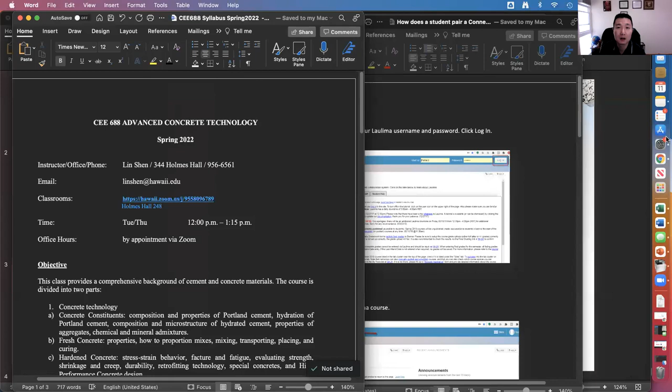So let's get started. Let's open the syllabus. Look at the syllabus. All right. So this is the syllabus. Anybody can see it? Yes, we see it. Okay, great. So there's some office information. All right, about the classrooms. So everybody knows for the first 2 weeks, we'll be doing online classes using this Zoom ID, 9558096789. There's no password.

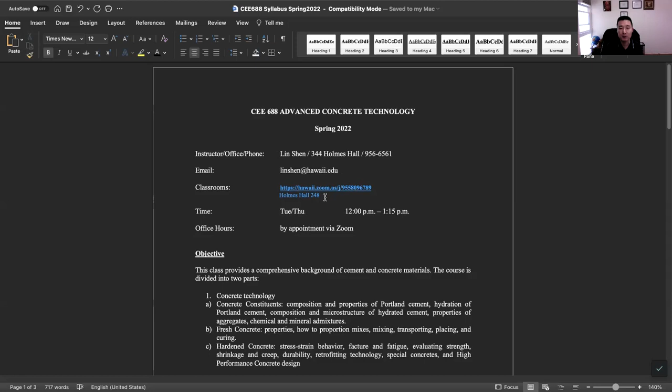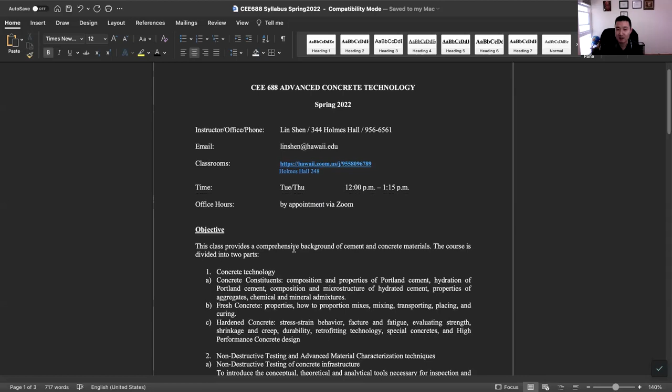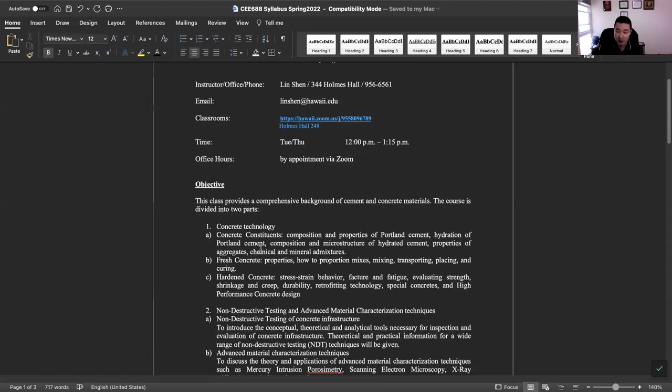We talk about concrete constituents, composition, properties of Portland cement, the cement chemistry, the hydration of Portland cement, microstructure of cement, properties of sand and coarse aggregate, and also admixtures, including chemical and mineral admixtures.

Okay. For fresh concrete, we talk about how we can measure the slump flow, air content, and other properties, and how to design a concrete mix, and how to prepare the concrete mix, transportation, placing, and curing the concrete.

For hardened concrete, we'll study the stress and strain behavior, fracture mechanics, fatigue, how to evaluate strengths and other mechanical properties, shrinkage and creep, long-term durability issues such as freeze-thaw, ASR, sulfate attack, corrosion, and so on.

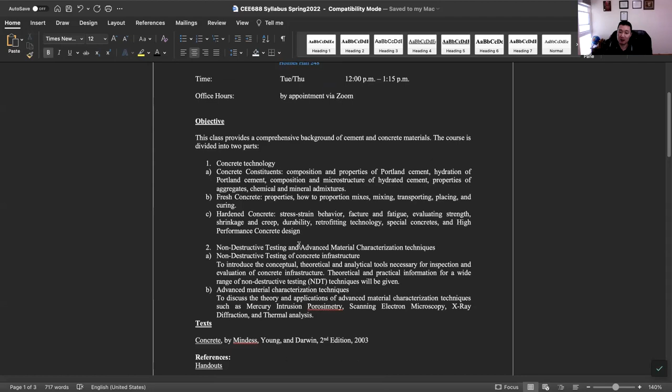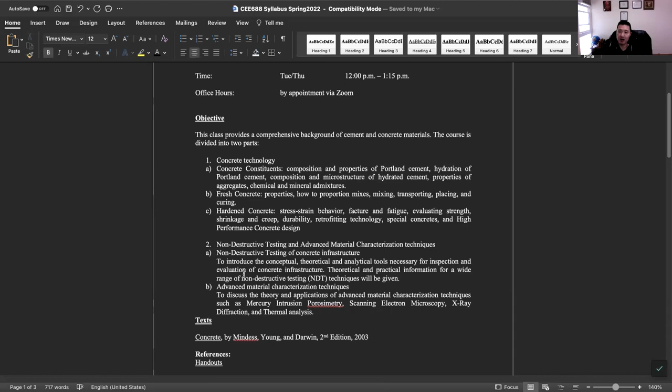Okay. And the second part of this class is called non-destructive testing and advanced material characterization techniques. So we'll talk about NDT methods, including ultrasound, ground penetrating radar, and how to choose different types of method depending on the applications.

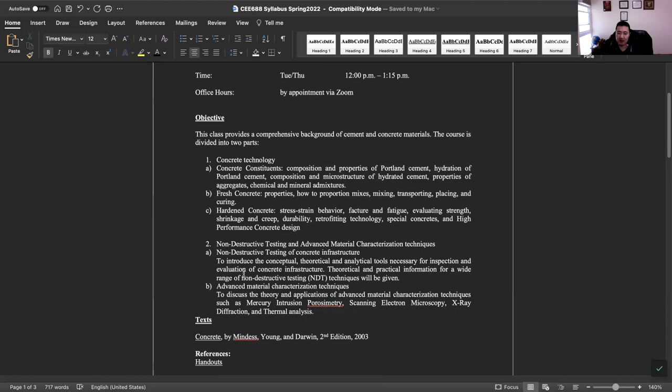We also study microstructure analysis techniques such as mercury intrusion porosimetry, scanning electron microscope, X-ray diffraction, and thermal analysis. So these are methods that are being used to study the microstructure and also chemistry inside the materials, not only limited to cement and concrete, but can also be used for other types of materials.

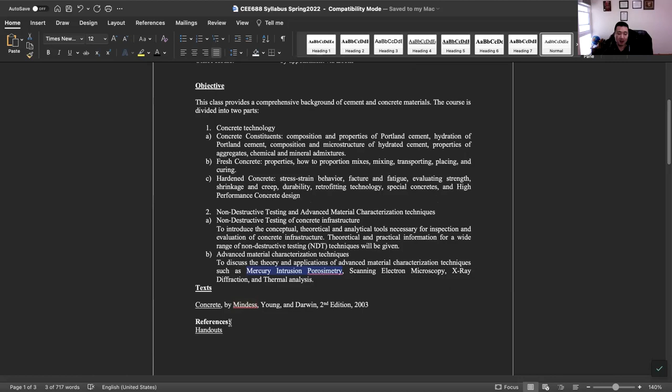The textbook, the title is called Concrete. The authors are Sidney Mindess, Young, and Darwin. This is the second edition. I'm not sure if you can find it from the bookstore. If not, you can try to buy a second-hand book from Amazon, for example.

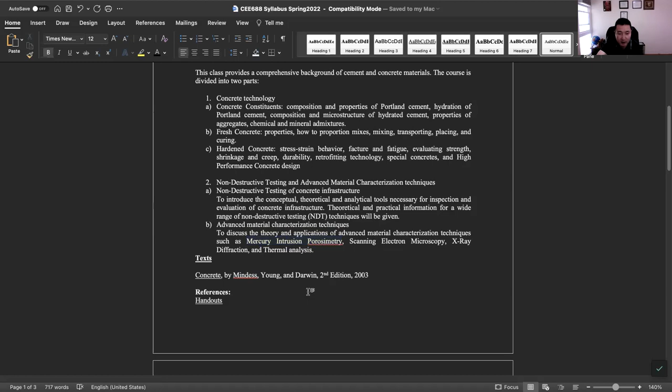I think for this textbook, you don't have to buy it for yourself. Maybe 2 or 3 of you can buy one book together. That should be enough. I also have one copy in my hand, so if you want to have a look, you can borrow from me. The majority of the information will come from handouts. So before the start of each lecture, I will upload the PowerPoint presentation so you can download it.

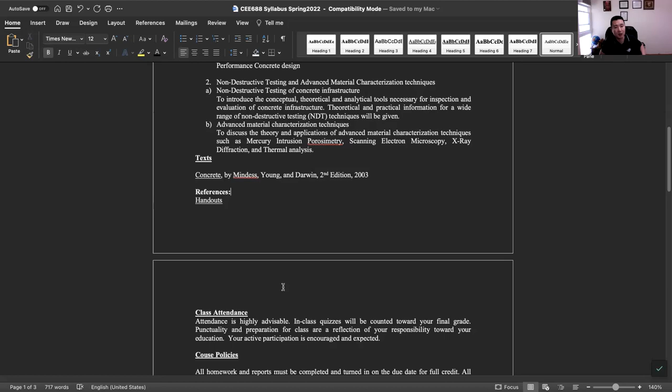All right. So what else? So about assignments, we have several homeworks, not too many, and also maybe 1 or 2 quizzes. We have 2 midterms and 1 final exam. The midterm is 15% each, and the final exam is 30%.

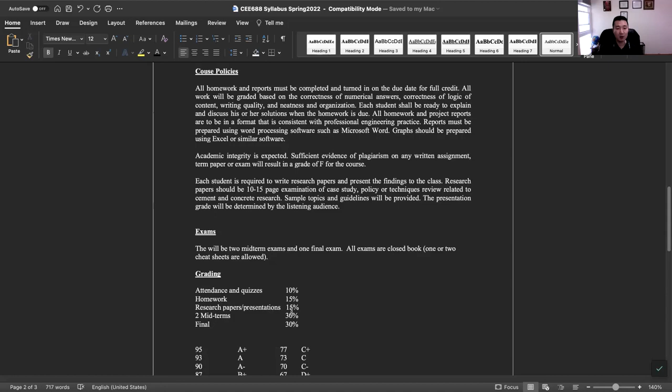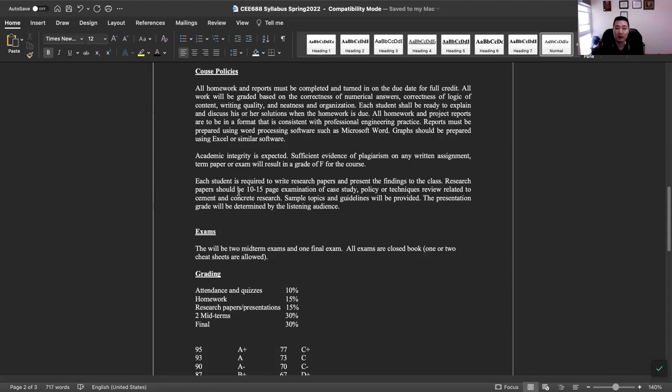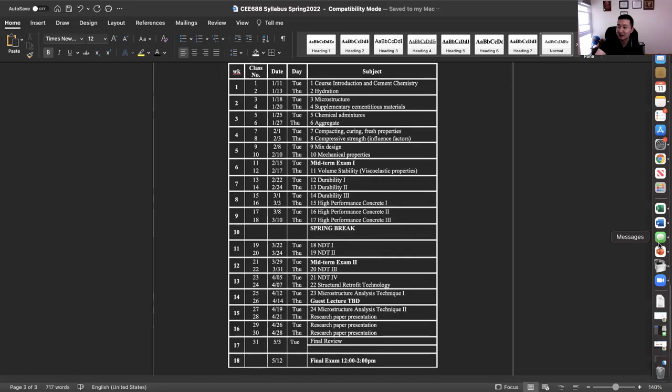All right, this is the tentative schedule for the class. Okay. So any questions before we start the formal lecture? Questions? Okay. Okay, so you downloaded a free copy of the textbook. Okay, that's wonderful.

So why should we study concrete? Concrete is by far the most widely used construction material. Actually, concrete is the most used man-made material. Concrete is the backbone of infrastructure. Almost any type of infrastructure can be made using concrete. Buildings, bridges, pavement, roads, you name it. So all kinds of infrastructure can be made from concrete.

In the US, every year, we use about 2 tons of concrete for each person. Concrete has a long service life. Well-designed concrete can last for hundreds or even thousands of years. Concrete is also resistant to fire and resistant to impact. The value of concrete is very high. The cost of concrete is much lower compared to steel and aluminum, and the cost of repairing concrete structures is relatively low compared to other types of structures.

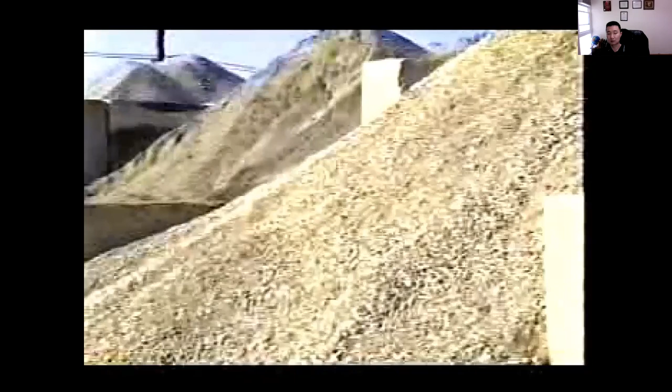Concrete is a mixture of Portland cement, water, and aggregates such as rock and sand. The aggregates serve as the filler material in concrete, while the Portland cement and water form a paste, which serves as the glue that holds the aggregates together. Through the chemical reaction called hydration, this paste hardens and binds the aggregates into a strong, durable mass we call concrete.

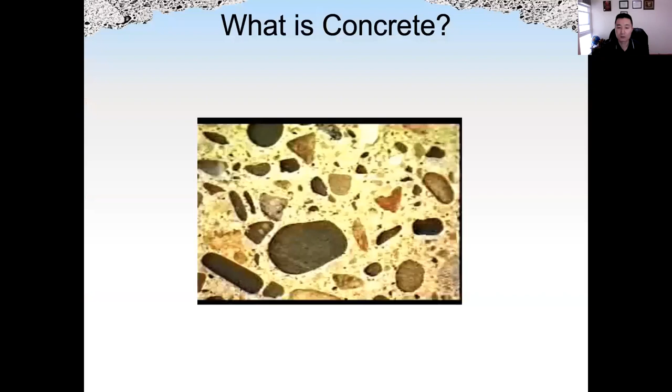So the word concrete is coming from the Latin word concretus, which means hold together, or formable rock. In concrete, the most important material is Portland cement. So why is it called Portland cement? We'll discuss that in a moment. This is the glue, the fine powder. Together with water, Portland cement will form cement paste. So that's the glue which holds other materials together.

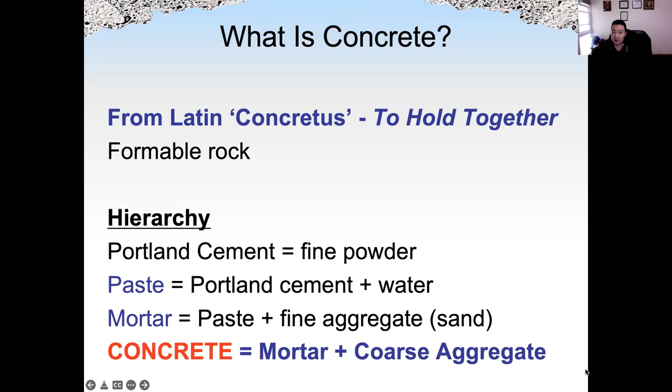Mix cement paste with fine aggregate, which is another word for sand, and we have mortar. If we add larger stone, which we call coarse aggregate, into mortar and mix it, we have concrete. So in concrete we have cement, water, sand, coarse aggregate, and any type of admixtures. It is not necessary, but it is very commonly used. We'll talk about admixtures in future lectures.

So depending on the requirement for the concrete, such as the strength, different concrete has different proportions of its materials, as we can see from here. Also, we have a small amount of air, typically around 1 to 3% by volume in the concrete. The air is put in concrete either on purpose or not on purpose. For example, if we want to increase the concrete's resistance to freezing and thawing, we use an air entraining agent to introduce small air bubbles in concrete, so concrete will be more durable in winter time.

The reason we put sand and coarse aggregate, small and larger stone, in concrete is, one, to reduce the cost. The cost of aggregate is about 10% or less compared with cement. Portland cement is the most expensive material in concrete, besides admixture. Aggregate can also reduce shrinkage and creep of concrete. If concrete shrinks too much, it may crack and reduce the strength and durability. So aggregate can also help to reduce the shrinkage cracking of concrete. And it will make concrete less brittle, increasing the toughness of concrete.

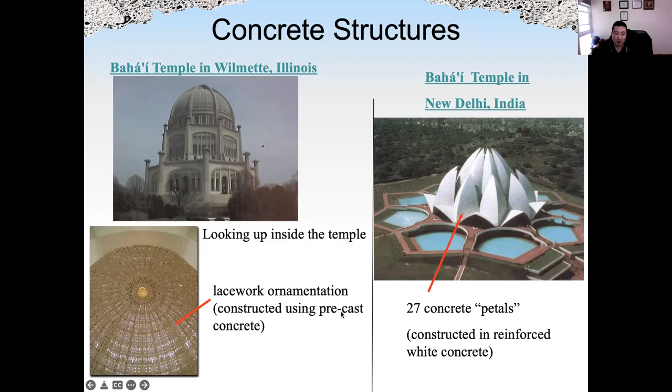So here are some of the famous concrete structures. The Baha'i temple in Illinois; the picture was taken near Northwestern University. The picture on the right is also called Baha'i temple. This is in India. The color of the concrete, as you can see, is white. It's made by white cement. Inside that cement, it doesn't have any iron, which makes the color white. Other than that, a typical concrete will have a grayish color. And concrete is called formable rock. It can be made into very complicated and delicate shapes, as we can see from the picture on the lower left. So this is one type of precast concrete.

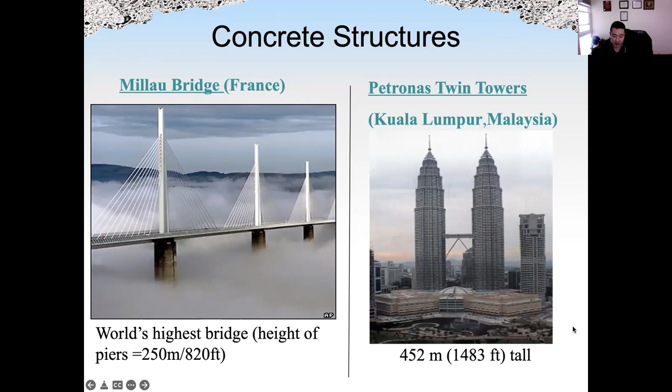So some of the biggest concrete structures: this is one of the biggest bridges, the Millau Bridge in France. The pier of this bridge is 250 meters, or more than 800 feet high. This is one of the tallest buildings, in Malaysia, the Petronas Twin Towers, 1,483 feet tall. The tallest building currently is in Dubai, the Khalifa Tower. The height is 2,700 feet. The total cost for this building is 1.5 billion US dollars, and it has 165 floors.

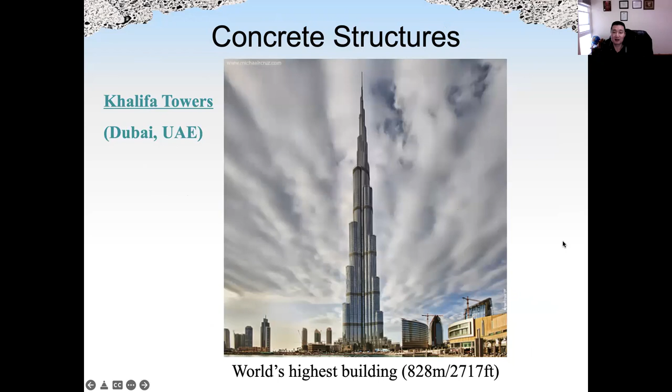So as we mentioned before, concrete can be used in roads, concrete pavement, reinforced concrete bridges, reinforced concrete buildings, waste treatment facilities, dams, nuclear reactors, subways, and so on. This table compares the important properties of concrete with other building materials. Concrete is in the last row, compared with steel and aluminum. Concrete is lighter, 2,300 kilograms per cubic meter. Steel is about 3 times of it.

The strength of concrete is much lower compared with steel, especially tensile strength. Compressive strength is in parentheses here. A normal concrete has a compressive strength around 30 to 40 megapascal. 7 megapascal is equal to 1 ksi. Tensile strength is much lower, about 10% of its compressive strength, so a typical concrete has a tensile strength of around 3 megapascal. The elastic modulus of concrete is around 25 to 30, which is also much lower compared with steel.

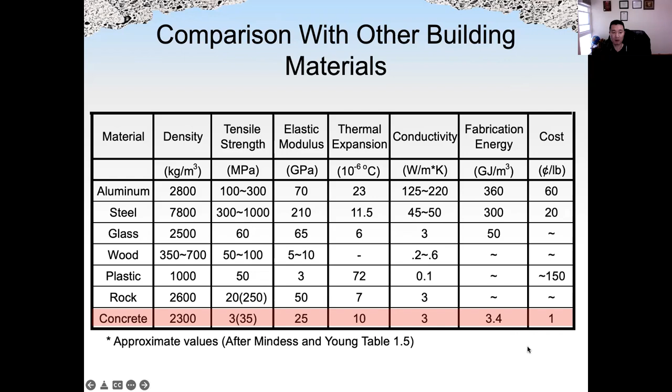This table is coming from our textbook, table 1.5. All right, pros and cons of concrete. Advantages: concrete can be made very durable, but if it's not designed very well, it can only last a few years. A well-designed concrete can last easily 100 years or even several hundred years.

It is cheaper, economical. Concrete can be formed on site to any type of shape very easily. Probably everybody has seen concrete cast in the formwork and formed on site. Concrete is also energy efficient. It is a very good thermal insulator and costs less energy to make compared with steel and aluminum.

Concrete is highly resistant to fire and has thermal resistance. Concrete can also be made resistant to water, so we can protect the rebar using the concrete around it. But concrete is very brittle, especially under tension. That's the major disadvantage for concrete, and that's why we use steel rebar in reinforced concrete structures.

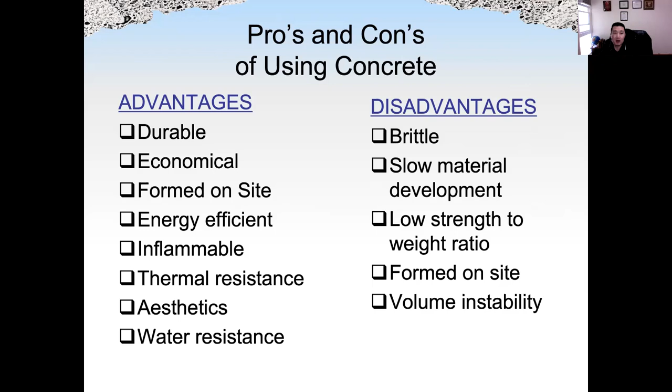So concrete has been with us for thousands of years, more than 5,000 years from ancient Egyptians. But ancient concrete is different from modern concrete. Around 3000 BC, ancient Egyptian engineers used gypsum mortar or lime with straw as reinforcement to make the famous pyramids. We'll talk about the chemistry of this ancient concrete in a moment. About 2,000 years ago, the ancient Romans built the famous Colosseum and Pantheon using their concrete. Again, their concrete is different from modern concrete.

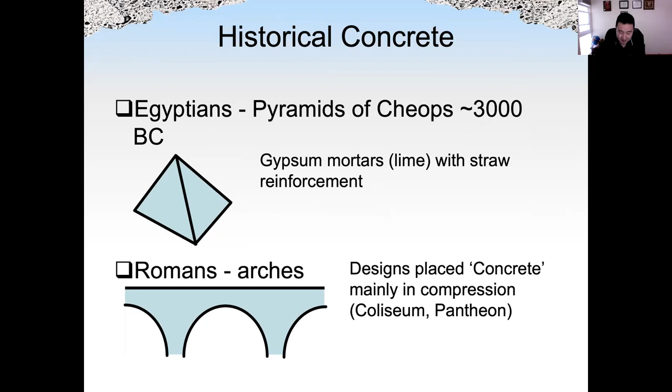All right, so everybody knows reinforced concrete, and why we put the rebar in concrete; we'll just quickly go over this. For a plain concrete beam without rebar, because concrete is very weak under tension, under this load the bottom part of the plain beam will crack very easily. So the moment resistance of the concrete beam without rebar will be very, very low. By putting the reinforcement in the tension area, we increase the moment resistance of the beam much more.

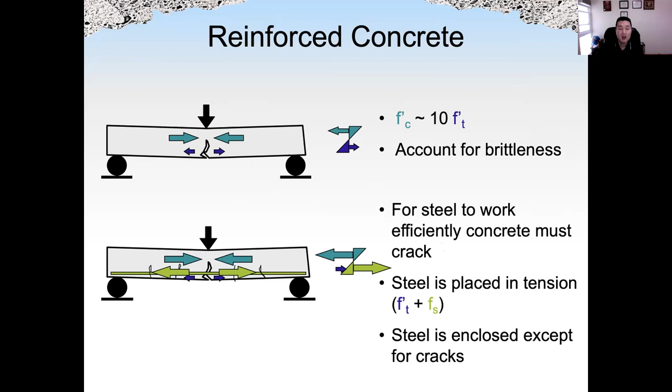So steel is placed in the tension area, but steel is easily corroded by water and oxygen, so it needs to be protected by concrete. Steel is enclosed except for cracks. For steel to work efficiently, concrete must crack first, but that crack is very minor. Without any cracking, the rebar and the concrete cannot work together. So any reinforced concrete member, no matter how well it's designed, must have some minor cracks for the rebar and the concrete to work together.

So here are some innovations in concrete fabrication. We can use precast concrete. We can make the concrete very flowable so we can even pump it. Shotcrete is also a type of very flowable concrete. We also discuss extrusion, a fabrication method that can make concrete into any shape. Self-consolidating concrete is concrete that needs no consolidation, which accelerates the production process. Concrete needs curing to develop its strength. We can use typical curing, high temperature steam curing, or even microwave.

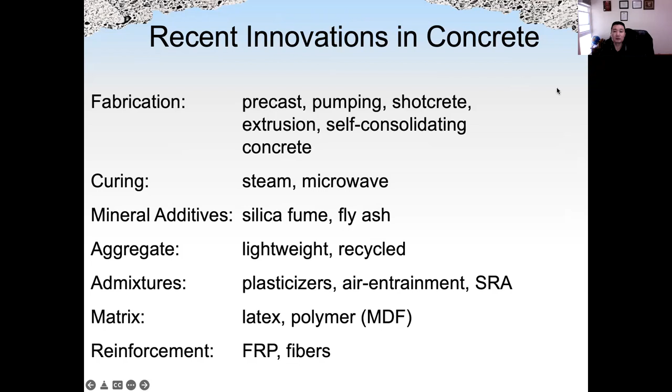So, question of scale. If we look at the concrete in macro scale, we see concrete as a homogeneous material. But in fact, we know already concrete has sand, has coarse aggregate, and also has cement paste. So if we look at the concrete in centimeter scale or meso level, concrete is not homogeneous. So we call that heterogeneous structures, because we can see aggregate and cement.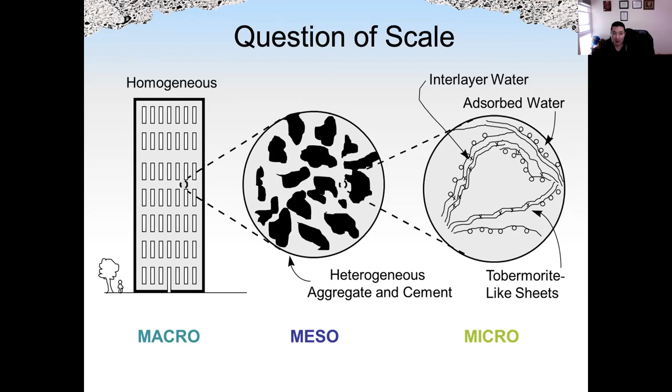So in order to better design concrete in the macro level, we need to study and understand the concrete in the micro scale and the meso scale. Okay, so that's the main purpose for this class. All right, so that's the short introduction of concrete. What is concrete? What are the major materials in concrete?

The second part of this lecture will discuss cement chemistry, so the major chemicals inside the concrete. So before we do that, we'll discuss what is hydraulic cement, what is so-called non-hydraulic cement, how to manufacture cement, the major cement composition, the chemicals inside cement, different types of cement, blended cement and special cement.

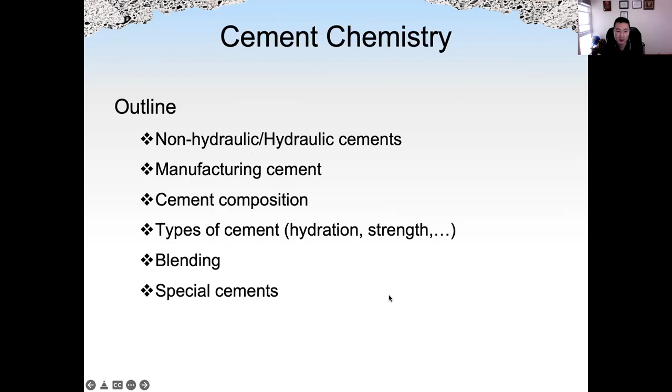Right. So this is ancient cement chemistry that the ancient Egyptians and ancient Romans used. So 5,000 years ago, the ancient Egyptians used this to build the pyramids. They used calcinated impure gypsum. Gypsum is calcium sulfate with 2 parts of water. So we heat gypsum to 130 degrees Celsius, and the gypsum will decompose into calcium sulfate with half water. We call that calcium sulfate hemihydrate, and it will release water.

So this calcium sulfate hemihydrate will be ground into powder. That's the second reaction. This powder form calcium sulfate hemihydrate will mix with water again, and then, as we can see, it will form gypsum. Gypsum has some strength, not as strong as modern concrete, but strong enough to hold the rocks inside the pyramid. So this is the ancient cement the Egyptians used.

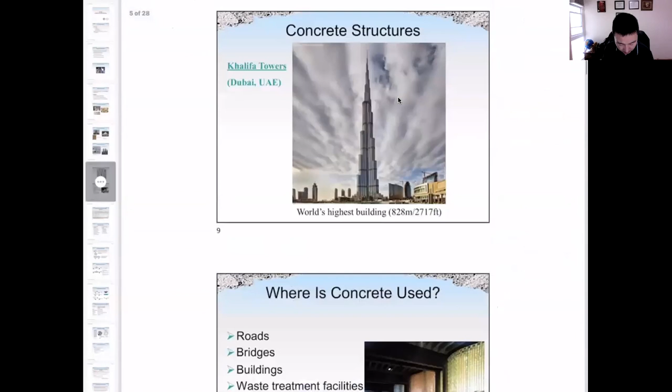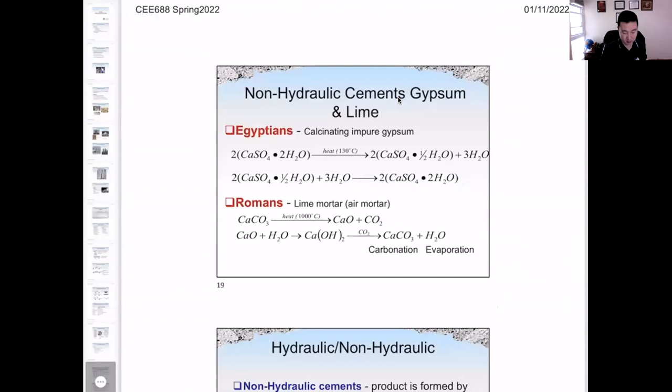Let me show you the chemical reactions of this. Let me show you how limestone will react with water. So CaCO3, limestone, is not easily dissolved in water, but over time, limestone CaCO3 will react with water plus CO2 coming from the air. It will generate so-called calcium bicarbonate, so this is not water resistant. So slowly over time, limestone may be dissolved in water.

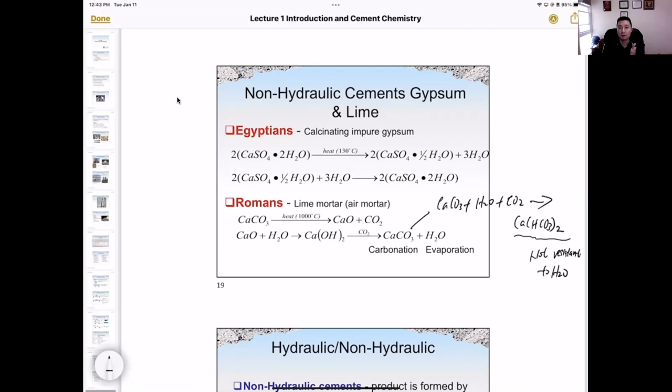All right, so then come back to non-hydraulic cement and hydraulic cement. So the so-called non-hydraulic cement, the product is formed by carbonation, such as the concrete used by ancient Romans and ancient Egyptians. But it is not resistant to water, as I just showed you. But it may be made water resistant by adding pozzolanic materials. We'll discuss this in future lectures, so don't worry about that.

Hydraulic cement is defined as hardened by reacting with water, and the hydration product is water resistant. For example, the modern Portland cement, the cement we use today. So Portland cement is a type of hydraulic cement made by pulverizing the clinker, consisting of hydraulic calcium silicate. We'll discuss how we can make Portland cement in a moment.

All right, so here shows a little history about hydraulic cement. The first natural hydraulic cement was invented in England in 1796. It's made by calcinating nodules of impure limestone and clay. So limestone, the major chemical in limestone is calcium carbonate. In clay, it has silica oxide, maybe some aluminum oxide, maybe some calcium oxide.

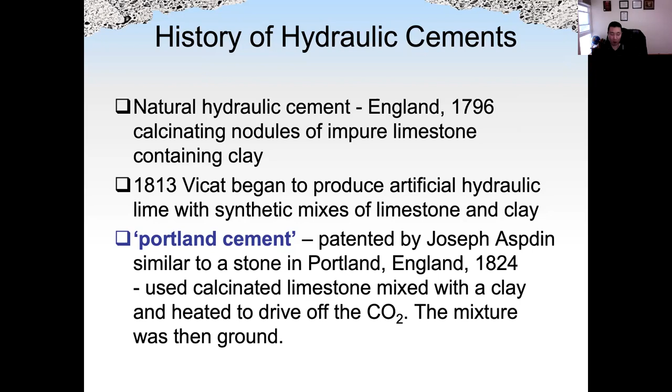All right, so here shows the picture of a stone coming from the small island of Portland in England. So this is a stone from Portland in England, and this is a cylinder of modern concrete. Again, the reason we call them Portland cement is because the color of these two is very similar. Nothing more.

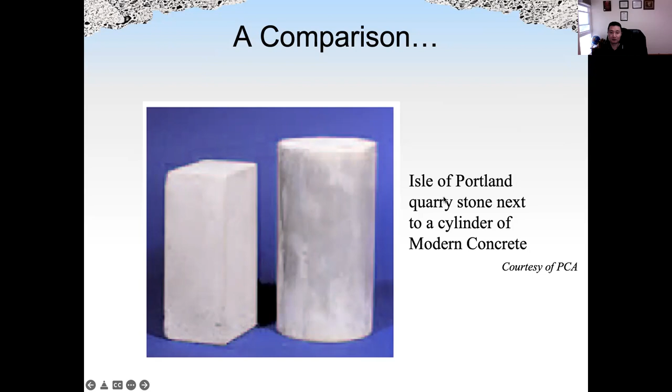How can we make Portland cement? So the major steps to produce cement. First, we need to obtain the raw materials from limestone, from clay. We need 4 major raw materials: lime, iron, silica, and aluminum. If you take the first letter from each of the words, you get LISA, or Lisa. We need lime, which is calcium oxide, iron, which is ferric oxide, silica oxide, and also aluminum oxide.

We prepare them, mostly grind them into smaller size, and then we burn these materials in a large oven. We call that clinker, the clinkering process or burning process. So finally, we grind this clinker into fine powder.

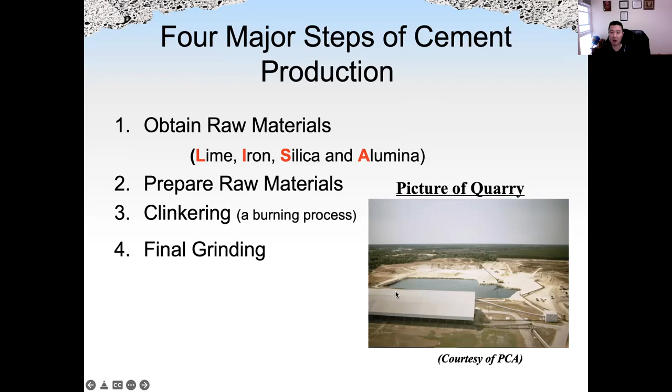So here is a picture of a quarry where we get our raw materials. The source of raw materials, remember, we need 4: calcium, iron, silica, and aluminum. You can see we also have the 5th raw material, sulfate. So why do we need sulfate beside the top 4? We'll discuss that in a moment. So let's look at the source of these raw materials.

So for calcium, we can use limestone, which is the natural source, or we can use some byproduct, such as cement kiln dust or slag. Slag is an industry byproduct of the steel producing process. For iron, it can come from clay or iron ore or other minerals such as shale. Silica can also come from clay, which is the natural source.

Fly ash is a major industry byproduct of the coal burning process, also called coal ash. We can also use slag to produce the silica needed for cement production. For aluminum, we can also use clay, fly ash, slag, shale, or other natural and man-made materials. Sulfate is mainly coming from gypsum.

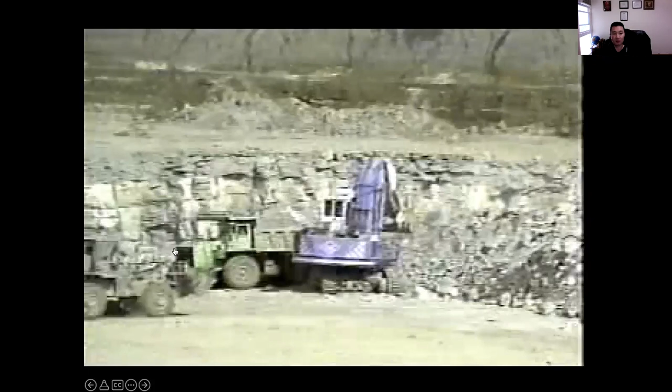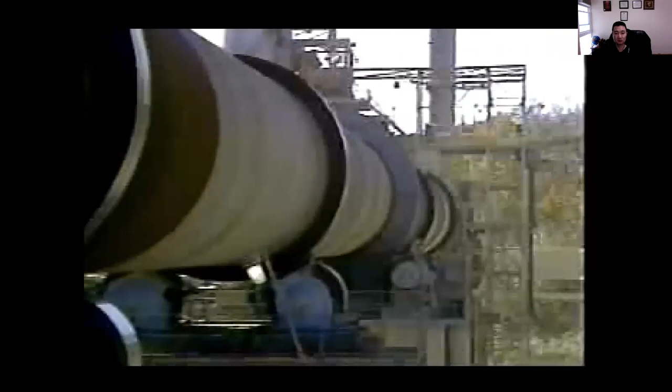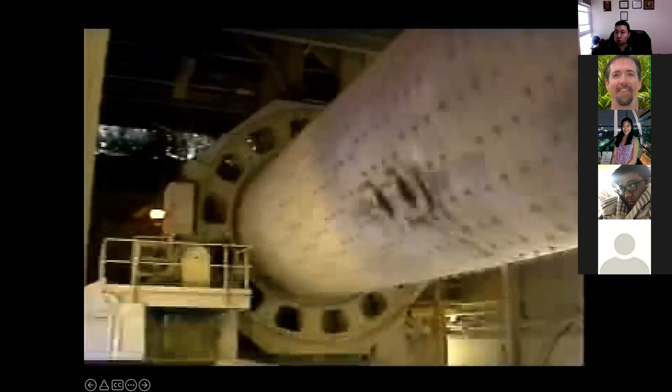Portland cements are manufactured by a process that begins by combining a source of lime, such as limestone, with silica and alumina, usually from clay, and a source of iron oxide, such as iron ore. The selected raw materials are then crushed, blended, and burned in a kiln to produce clinker. Once cooled, the clinker, with a small amount of gypsum added to regulate the setting time of the cement, is ground in a mill to produce the extremely fine gray powder called Portland cement.

Okay, so the first step is we need to get the raw materials from a quarry. Limestone, shale, clay. The stone is reduced to a smaller size, from 5 inch to less than 1 inch, and stored.

So the second step is the raw materials need to be ground into powder and blended accordingly. Limestone, clay, sand, iron ore are proportioned and ground into smaller size. In the second step, we have 2 types of processes: the dry process and the wet process.

So the difference between these 2 processes is for the dry process, no water is added. For the wet process, water is added to facilitate the grinding process. For modern Portland cement production plants, mostly the dry process will be used. So this is the newer method, the dry process.

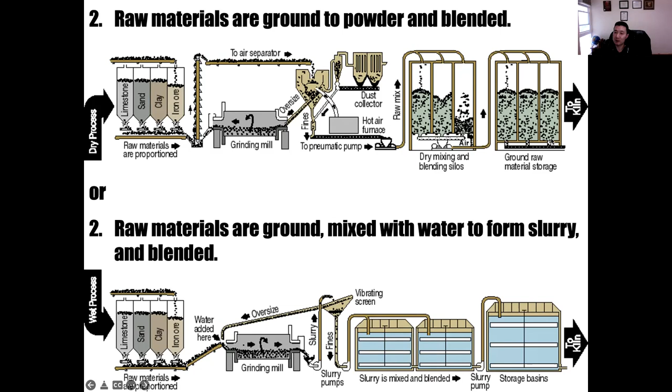So after the raw materials are mixed, they will blend it into silos and ground raw materials into storage before they go into the next step, which is the burning process inside the kiln.

Okay, so this is the kiln, which is a huge oven with very high temperature inside it. The kiln is slowly rotated, so the speed of the rotation is very slow. The diameter of the kiln is around 20 feet or more, and the length of the kiln is around 500 to 600 feet.

So very big, and you can see there's a slope inside the kiln. So the raw material is coming from the higher end and slowly going to the lower end, and inside the kiln, the clinker will be generated. We will look at the details in the next slides.

So materials coming from the kiln is called clinker. The clinker will mix with the gypsum and be further ground in the next step, which is step 4. So the clinker with gypsum is ground into fine powder, and we call that Portland cement.

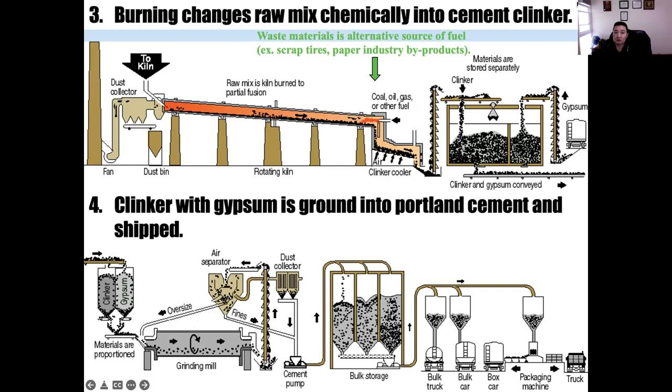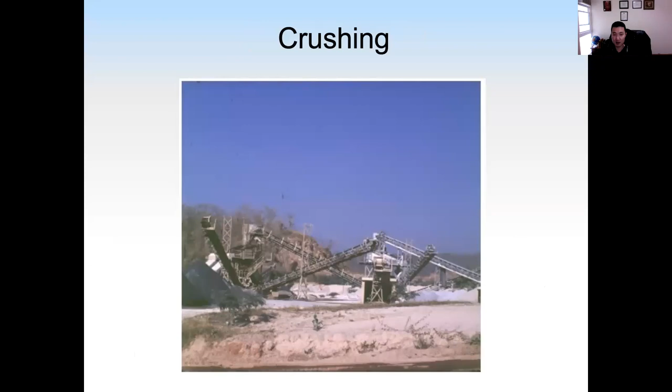So here shows the picture of a quarry. The larger stones will be crushed into smaller size. So this shows the crushing process. And then different raw materials will be blended before going to the kiln.

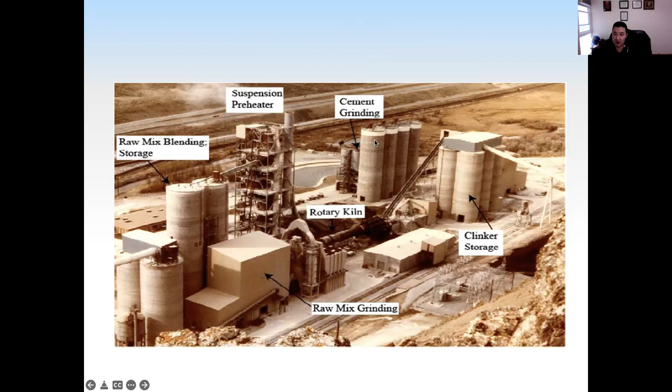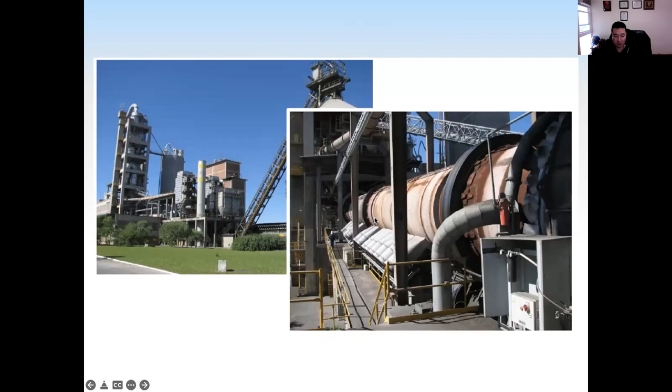So the larger picture of the kiln, as you can see, it's very, very big. Another picture of the kiln. So the rotational speed of the kiln is very slow. Every hour, it will only rotate like 60 revolutions. So 1 revolution per minute. So slowly rotated.

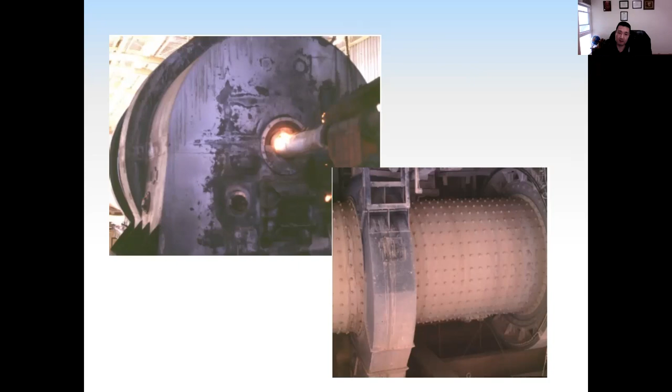All right. So the burning process in the kiln will generate a lot of pollution, and also use a huge amount of energy because the temperature inside the kiln is very high. In fact, to produce 1 ton of cement, 1 ton of CO2 will be generated. About 7 to 10% of the total man-made greenhouse gases come from production of cement. So a lot of air pollution, a lot of energy.

So schematic of cement production. Again, we have raw materials such as limestone, clay, and shale. They provide different raw materials: calcium oxide, silica, alumina, and ferric oxide. They ground it and store together. They go into the preheaters before going to the burning kiln.

Inside the kiln, cement compounds such as C3S, C2S will be generated. And then gypsum will be added into the clinker for final grinding.

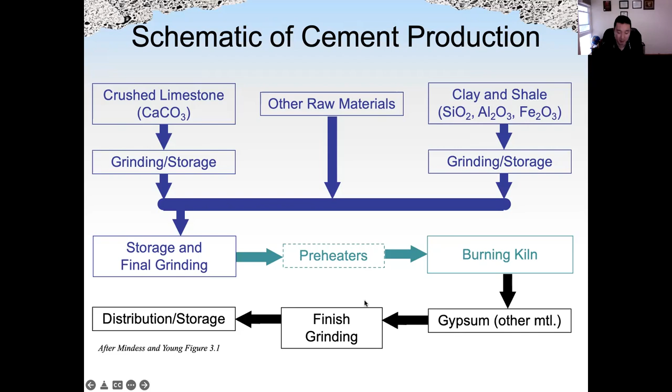All right, here shows what happened inside the kiln. So the raw materials are fed on the higher end, depending on the temperature. We can see the gas temperature or the feed or raw material temperature. So the temperature increases from 450 to more than 1500 degrees Celsius.

So the first zone is called the dehydration zone. The water is evaporated, CO2 is generated because the clay will decompose and release this CO2. And then the calcination zone, where limestone will decompose and release CO2. At the lower end of the calcination zone, we'll have initial formation of C2S. We'll talk about this in a moment. So C2S is one of the major compounds of cement.

And then we have the clinkering zone, which is between 1350 to 1550 degrees Celsius, where the formation of melt occurs. The melt is a combination of C3A and C4AF, other compounds to be discussed in a moment, and also formation of C3S. All right, clinker is out of the lower end of the kiln. So look at the clinker picture on the left.

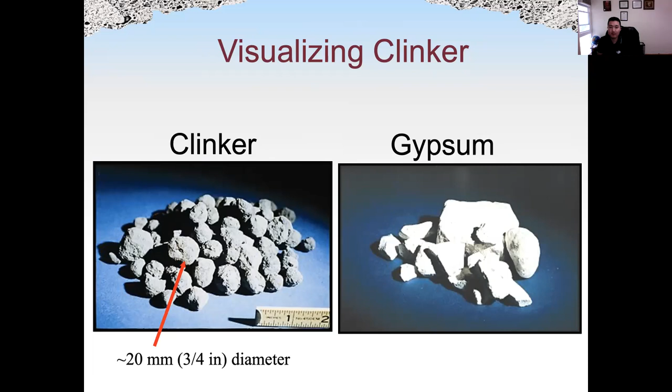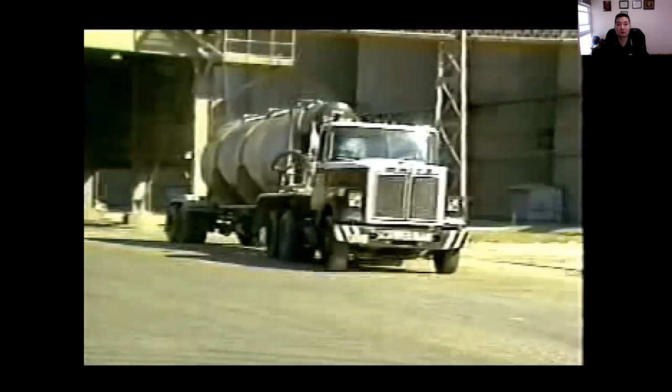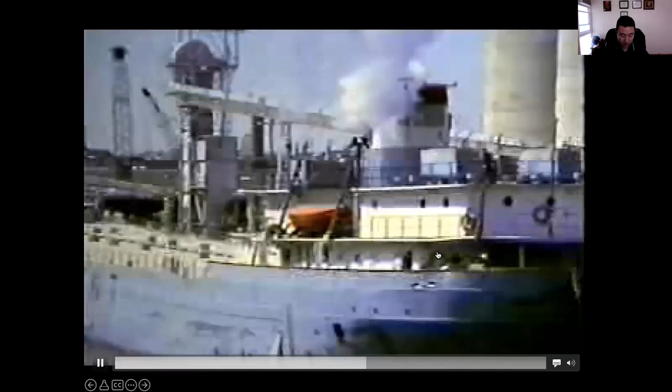All right, so how can we deliver cement? Portland cement is available as a bulk powder or in waterproof bags. Most Portland cements are shipped in bulk using closed tanker trucks, covered rail hopper cars, rail tank cars, covered barges or ships with closed compartments. Pneumatic loading and unloading of the transport vehicle is the most popular means of handling bulk cement.

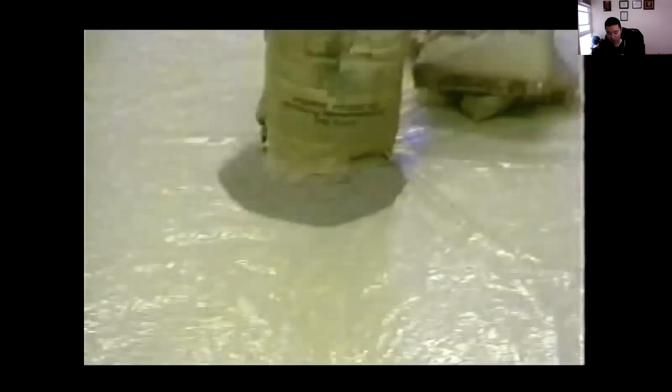All right, so delivery of cement and the storage of cement. Portland cement is a moisture-sensitive material. If kept dry, it will retain its quality indefinitely. Cement stored in contact with damp air or moisture sets more slowly and has less strength than Portland cement that has been kept dry. The relative humidity in a warehouse or shed used to store bagged cement should be as low as possible. Cement bags should not be stored on damp floors, but should rest on pallets.

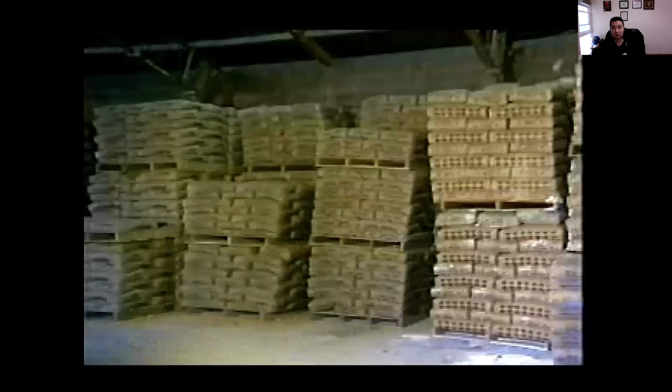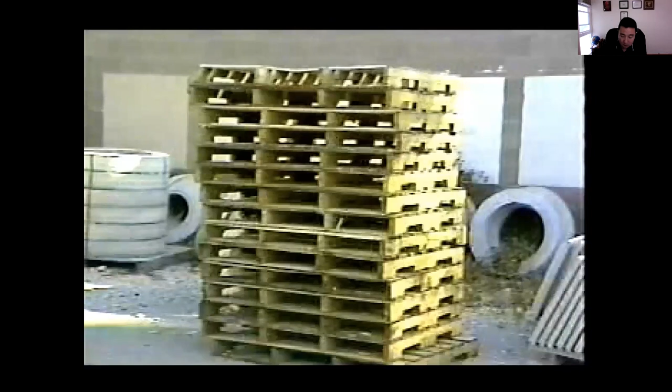Bags should be stacked close together to reduce air circulation, but should never be stacked against outside walls. Where a shed is not available, bags should be placed on raised wooden platforms at least 4 to 6 inches above the ground. Waterproof coverings should fit over the pile and extend over the edges of the platform to prevent rain from reaching the cement and platform. So we need to keep the cement dry before we actually use it. Otherwise, it will react with the moisture.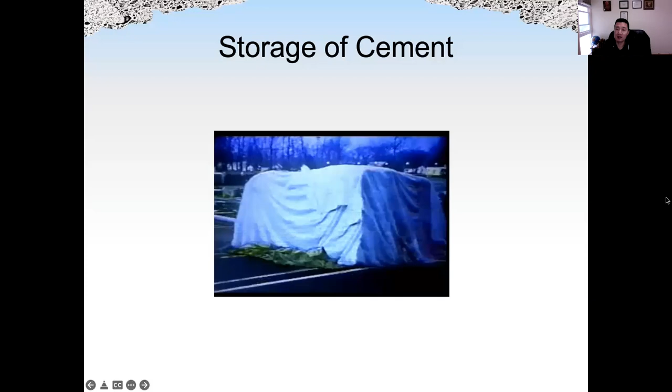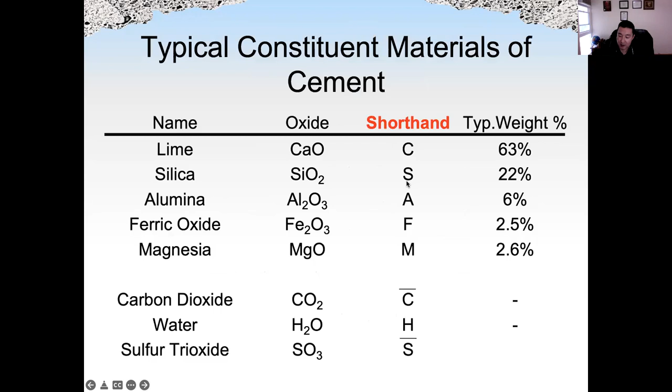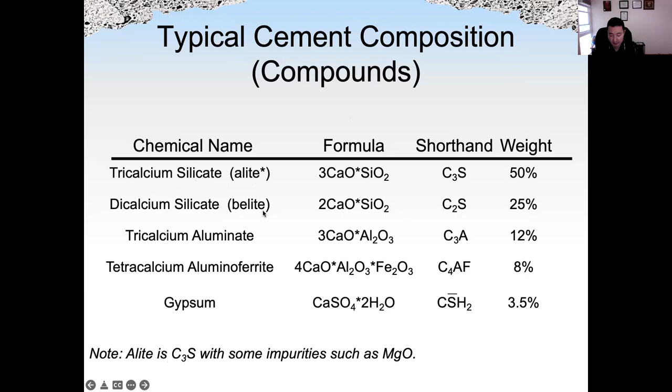All right. So this is some new information we haven't learned from CEEE688, I believe. It is called Bogue calculation. It is a formula, not very accurate, to calculate the percentage of the compounds such as C3S and C2S from the percentage of oxide. Why can't we measure the compound directly? It is harder to measure the percentage of a compound such as C3S, but it is much easier to measure the percentage of oxide using XRF, which is X-ray fluorescence spectroscopy.

So the purpose of Bogue calculation is to make it easier to estimate the percentage of the compounds, C3S, C2S and so on, from the oxides. There are some assumptions, which are listed here. You can just read them. You are not required to totally understand the meaning of these assumptions. This is just for your information.

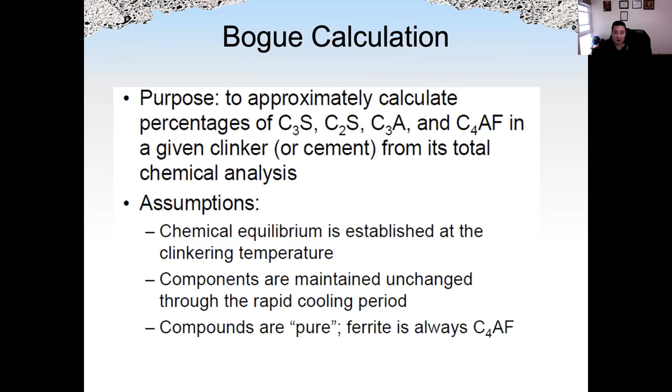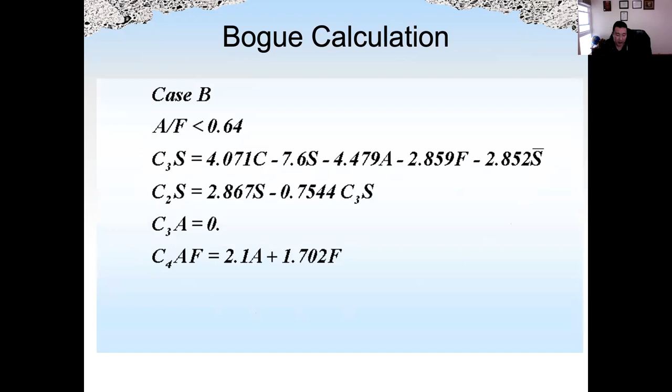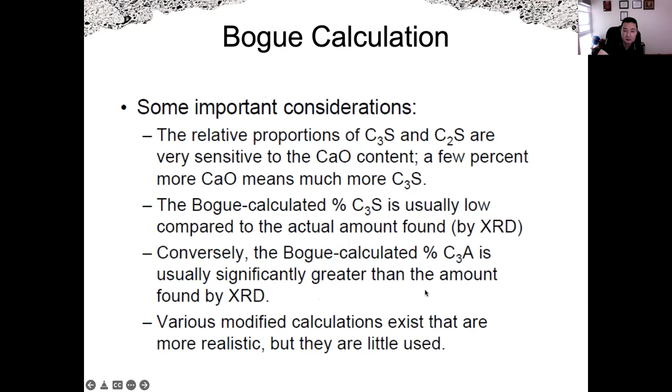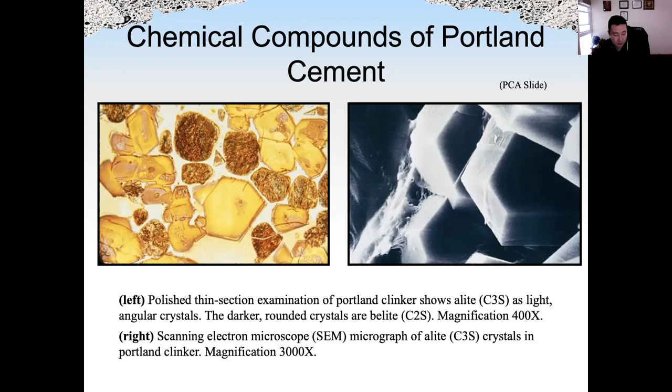We can also use X-ray diffraction to analyze the major compounds such as C3S and C2S, but it is not very easy. In this class, just remember we could use X-ray diffraction to measure the compounds, but because the peaks of different compounds overlap, quantification is very difficult. In later lectures we'll discuss how we can use X-ray diffraction to analyze the chemicals inside the samples.

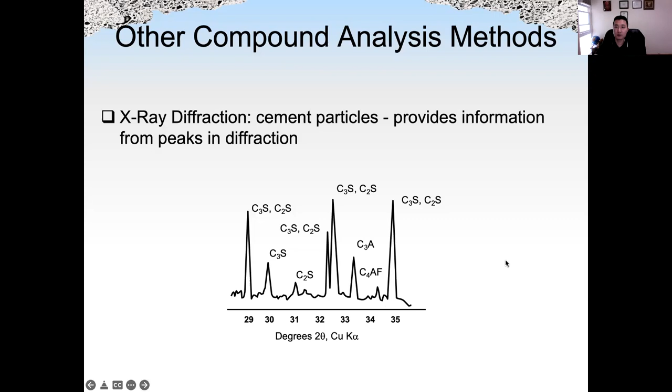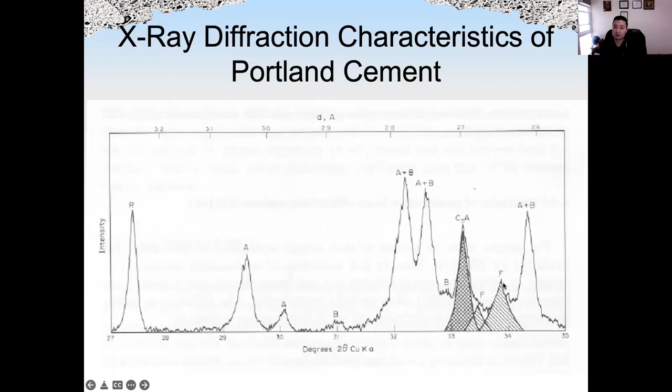So this is another picture of using X-ray diffraction to measure the different compounds. Here A is for alite, B is for belite, or C2S. So here is the limitation of X-ray diffraction. As I said, it is very hard and challenging to quantify the percentage of a compound using X-ray diffraction.

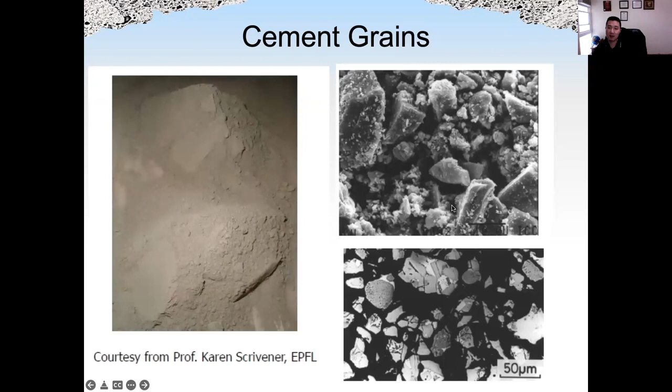So the typical Portland cement, as shown in the picture on the left, is grayish in color. If we look at the cement using SEM, you can see it has small fine particles. The average size of cement particles is around 10 micrometers.

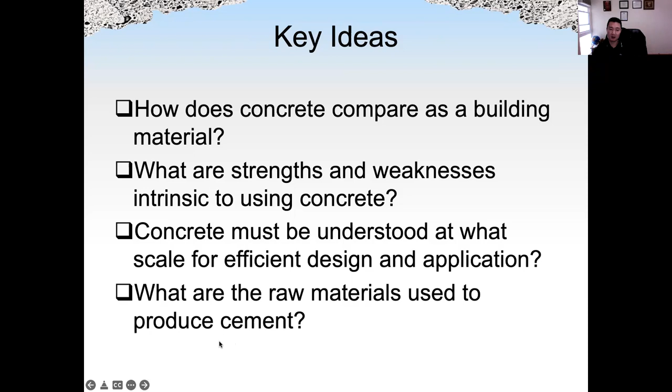So the key idea for this lecture is how concrete as a building material compares with steel and aluminum. What are the pros and cons of concrete compared to others? And concrete must be understood at the microstructure and mesostructure, so we can better design and apply concrete. So what are the raw materials used to produce cement? That is easy. That's LISA, L-I-S-A.

So why does cement need to be kept dry? Because if cement is mixed with moisture, it will hydrate. In the second lecture, Wednesday this week, we'll discuss how cement reacts with water and what type of chemicals it generates. So what are the major oxides or constituent materials in cement?

So what are the major compounds in cement? The constituent material is oxide, such as calcium oxide. Compounds are C3S, C2S, C3A, and C4AF. So go back to the two slides about the oxides and compounds and try to remember the shorthand. And finally, how to use Bogue calculation to estimate the percentage of compound using the oxide.